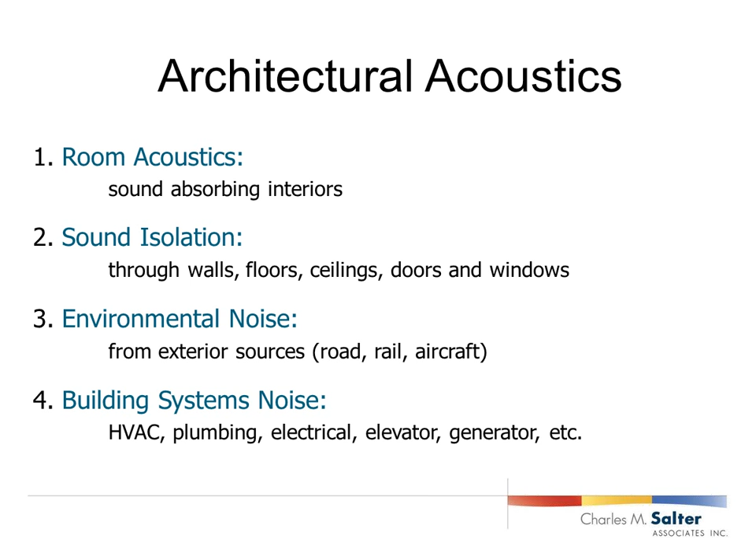Historic buildings pose specific challenges for acoustical engineering. The first is materials and appearance. We're often trying to match the period aesthetics, picking acoustical materials that don't look inappropriate for the space. The other issue is not disturbing existing historic elements. There may be architectural features being preserved, with limited space to apply new acoustical treatments.

The second issue is a changing noise environment. You may have a noisier building than the original functioned as, such as a music venue that used to be a warehouse. You also can deal with a louder exterior environment than originally, like a new roadway, expanded roadway, or a new flight path over the building.

The third issue is adaptive reuse. You may have new interior noise criteria, where the building needs to function quieter than it did before. This comes into play especially with environmental noise and HVAC noise, getting the NC rating down where it's appropriate. The other issue is installation of building systems. Oftentimes you may be installing a larger HVAC system, and this can cause problems for noise.

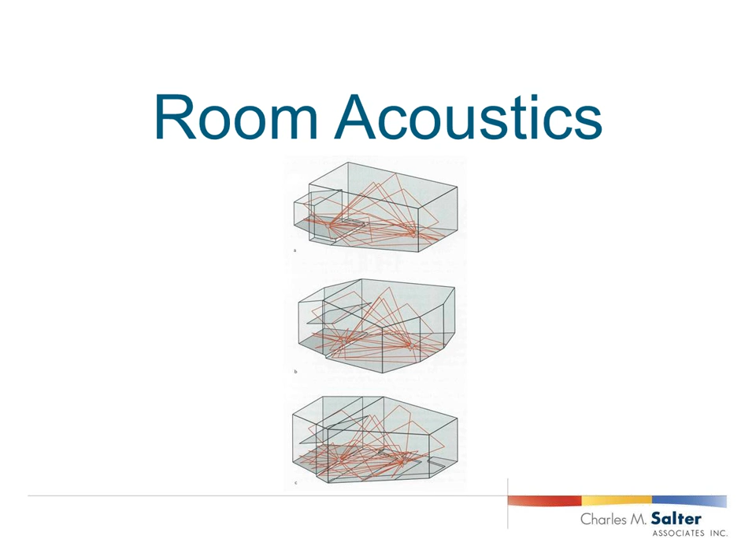This is the first of the four elements we'll be discussing as part of architectural acoustics, which can be thought of as the reflectivity within a given room. Here we see ray diagrams from a computer model, from a source on a stage of a performing arts venue to a receiver. This was an analysis that's in the appendix of a book we wrote, and we'll talk more about that in a few minutes.

Room acoustics is basically designing the building interior for aesthetic quality and pleasurable listening. This would be analogous to picking soothing colors, if you're an architect. It involves the analysis of direct and reflected sound. So when we're standing outdoors, what we're hearing is direct sound mostly, and maybe reflections off the ground, but we are not enclosed, so we don't get walls or ceiling reflections.

Speech intelligibility is something common to many building types, and it would be improved by reducing reverberation. This is really important. We've got the example of poor speech intelligibility in a cathedral, where you have a 3 or 4 second reverberation time, versus excellent speech intelligibility in a really well-designed conference room or even a recording studio.

So where we would concentrate on room acoustics is any place where speech or music or any other form of audio communication is to be transmitted to a listener. So you get spaces like theaters, concert halls, cinemas, restaurants, classrooms, courtrooms, places of worship. All of these can have a consideration for room acoustics.

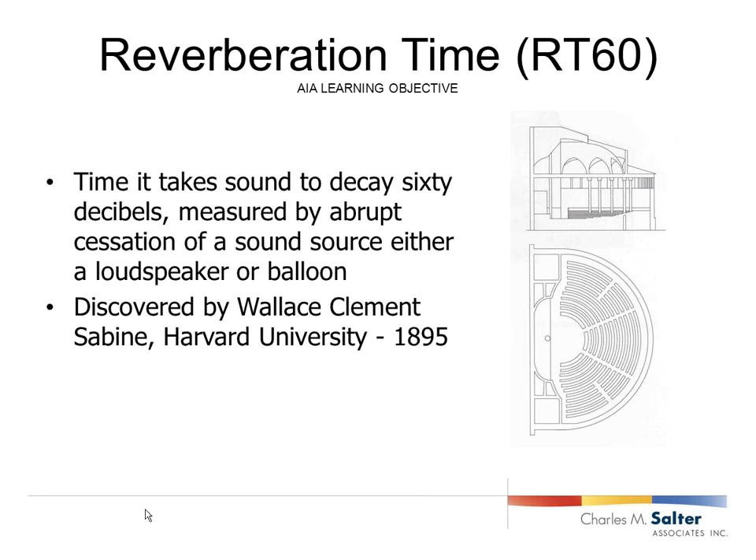So what determines reverberation time? Sabine discovered that it's directly proportional to room volume, so one would expect a cathedral to have a much greater reverberation time than a conference room due to its size. However, he also discovered that it was inversely proportional to the amount of cushions or sound absorption he brought into the theater.

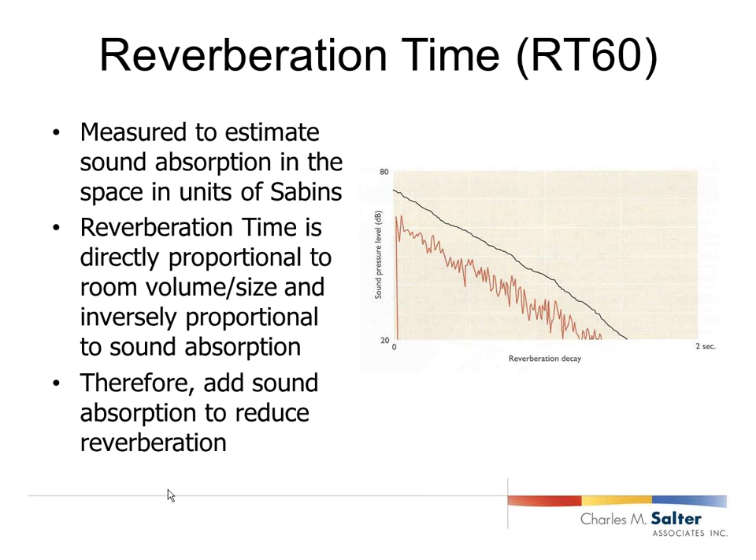So if you wish to reduce reverberation, you can add sound absorption, or you may even be able to decrease the room volume just a little bit.

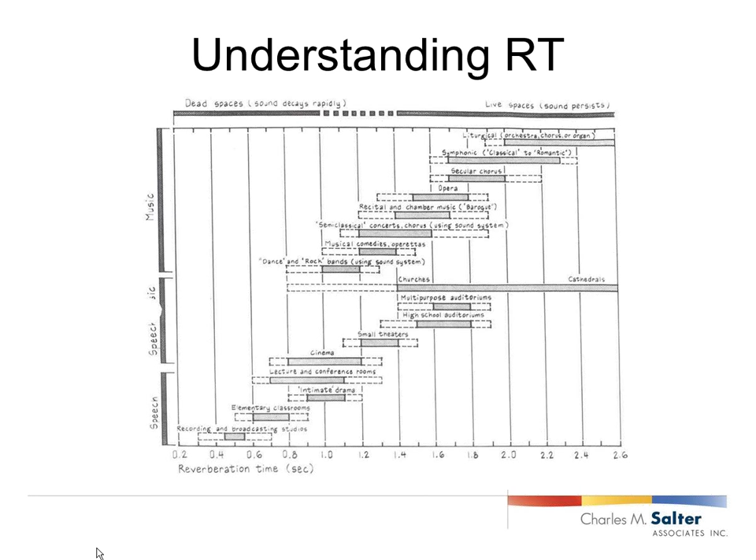In fact, cathedrals can go out to 10 seconds. So from graphs like this in acoustical textbooks, you can get a rough idea of where your space should fit in. This is an older graph - it shows cinemas at somewhere between 0.8 and 1.2 seconds. We learned in the late 80s from Tom Holman at THX and Ioan Allen at Dolby that in fact that needs to be much lower.

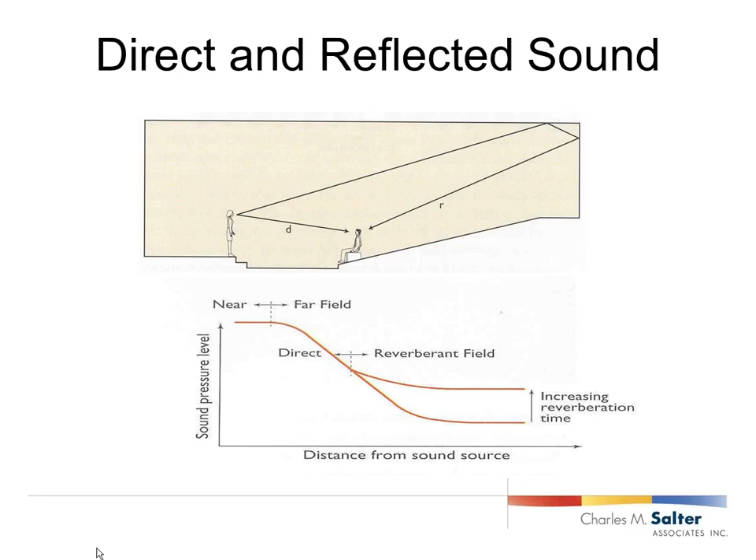You can see a dashed line there, and that's right where the listener is sitting up above. He's in a pretty good spot because he's getting probably enough direct field. However, the rest of the audience in this room is in the reverberant field. The only way we can improve that is shown by the line for increasing reverberation time - if we decrease reverberation time, we will get a larger direct field covering more of the audience. So that's how the physics of this works.

In talking about reverberation, we tend to think about specular reflections first, which bounce around like in the very first room acoustics slide I showed - the angle of incidence equals the angle of reflection. The problem with those kinds of reflections, largely from large, flat, hard surfaces like big expanses of drywall, plaster, glass, or stone, is that they're very harsh reflections, analogous to glare in lighting.

So when we design spaces, we go looking for absorption to control the reverberation time to an appropriate level, and diffusion to prevent this glary, harsh type of reflection.

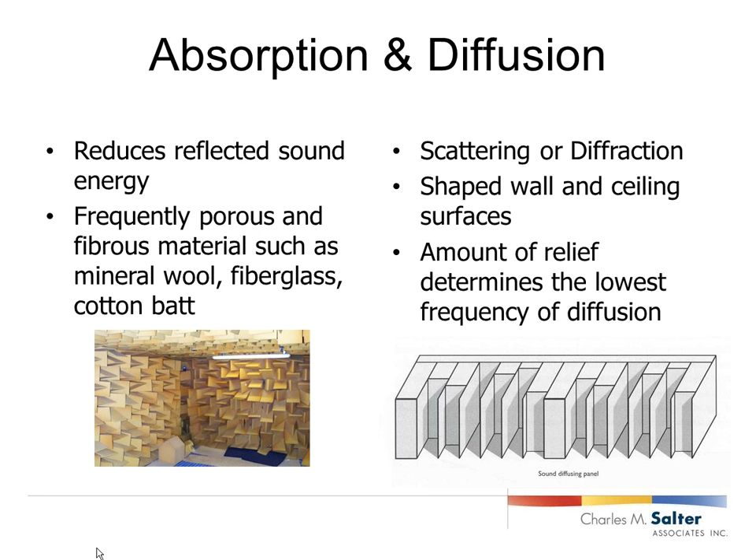On the other side, we have the idea that we don't want specular reflections, but we want reflectivity. So we shape a surface in a certain way - you've seen these convex and concave surfaces, with convex usually being preferred. We also have this thing here, which is a special diffuser called a prime root diffuser. There's a company called RPG that has done a lot of work with that kind of thing and offers quite an array of products in this line of room acoustics.

We're mostly familiar with sound-absorbing panels, and these are almost commodity items today - think of Armstrong, Owens Corning, and these big fiberglass manufacturers. These things can be wrapped in porous fabric, often like a Guilford FR701, which is fire retardant. The porosity means we can allow air to pass through it - a test of a porous fabric is, if you put it up to your mouth, can you blow air through it? Those are very common and fairly economical.

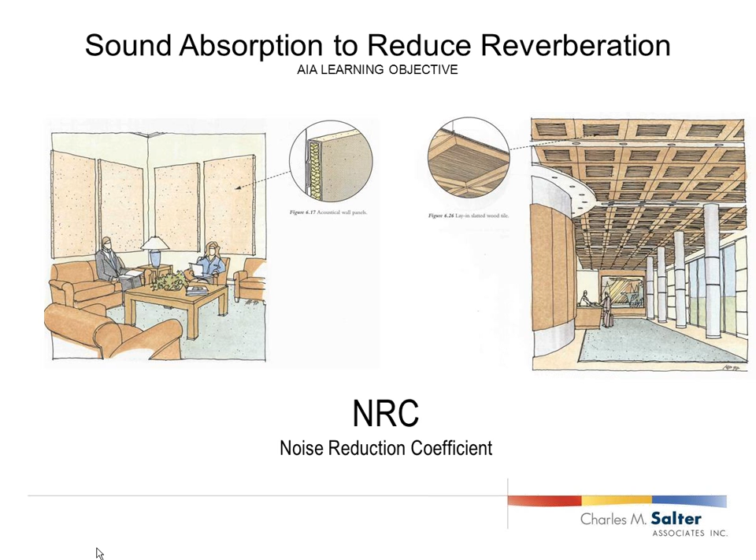Probably the least expensive sound-absorbing material is a lay-in ceiling. However, there are a lot of other ways we can have a different appearance for sound-absorbing material - it doesn't have to be an acoustical tile ceiling or a fabric. Nowadays we can have perforated wood, slotted and perfed metal, and porous sintered metal. So there are a lot of coverings that can be used to conceal the sound-absorptive material. Of course, the covering has to be sufficiently porous, and sometimes the coverings act like a filter, so we need to be careful about the selection of the covering.

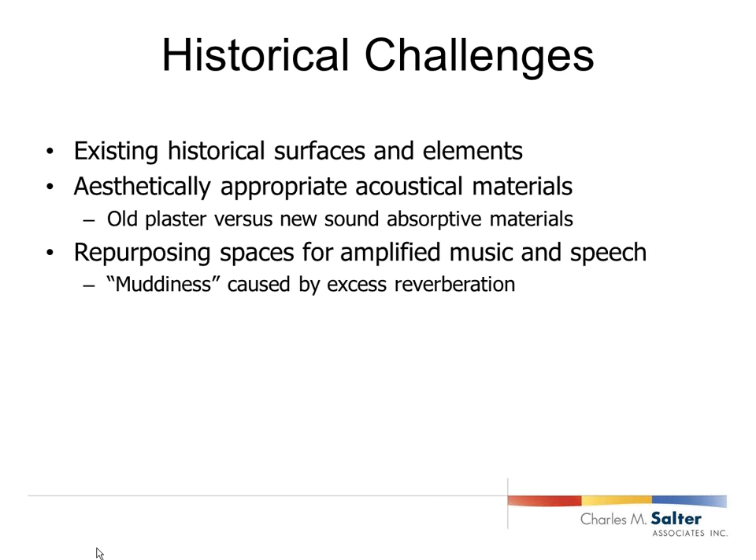The other issue is repurposing spaces for amplified music and speech. Oftentimes a space may be fairly reverberant, with a lot of that old hard plaster, and you get a muddiness in the space when music and speech are loud. You don't want a lot of reverberation because it starts becoming almost like echoes, where sound lays over on top of itself and you can't hear the person the way it's meant to be heard.

Some of the solutions to room acoustic problems are shown on this slide.

These are going to be the products with historic style. Luckily, there's more and more options being manufactured all the time. A pretty cool one that's fairly new is the Armstrong Metallaire, a perforated panel that can come in all these colors, and it really looks nice in a historic space, letting you match it up with what you're trying to do aesthetically.

On the right corner is the cotton bat that David talked about earlier. It's a recycled product, so it's also considered a nice green product, and it really presents a historically authentic acoustical environment. You might get your space back to what it would have sounded like when it was originally built, because they probably used cotton bat as absorption originally.

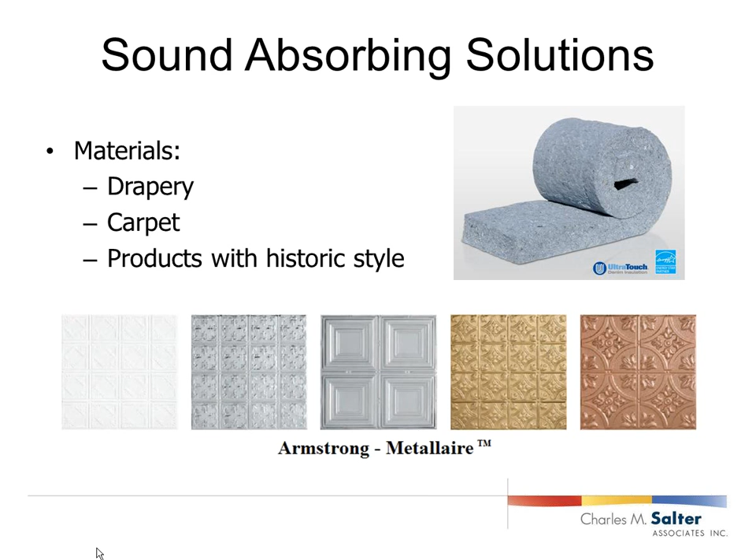We also find that adding drapery and carpet is a pretty good solution. Drapery can look really nice, especially in theaters. Carpet can be applied in restaurants and along the aisles of theaters and whatnot.

And we're going to come to our first case study. This is Cavallo Point in Sausalito, California. It's a military fort that was converted to a luxury lodge, and this picture is their restaurant. They've done a lot of good things in here. Most people can relate to restaurants being an unpleasant, noisy environment. We've all been in those restaurants that are concrete and glass, and they're really pretty, but they're not that pleasant.

Our next case study is a theater in California, a movie palace from 1928 that's been converted to a music venue for both amplified and acoustic music. There's some cool things in this one. One option they've gone with is applying absorptive materials behind these acoustically transparent spaces, so without disturbing the existing architectural elements, they were able to add absorption.

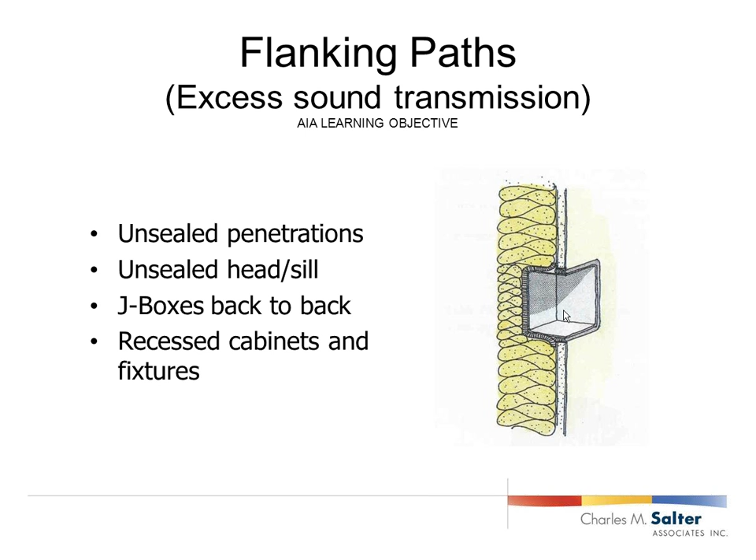So we would back into those kinds of things in drywall. It's a lot like fire rating. If you think of some of the things you do in fire rating and smoke rating, a lot of that is true for sound rating. So sound rating and sound isolation are really the same thing.

Now, what are some of the physical characteristics of wanting to improve the sound isolation or STC? Well, we can double the mass. So if we have a window, we could double the thickness of the glass. We would expect maybe to get somewhere in the range of 4 to 6 points. In theory, we should get a 6 dB improvement, but that doesn't always happen.

If we double the airspace, so if we build a wall and we use 3 5/8 studs, and then we come back and use something that's almost twice that much, we could maybe expect a 3 or 4 dB increase. In some cases, if we decouple the studs, we might get a 5 or 6 dB increase.

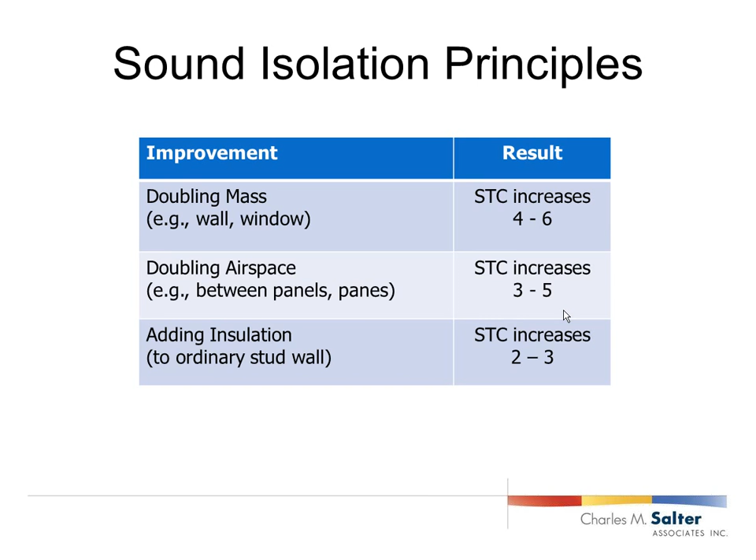Now, for something to be sound rated, it really must be insulated and caulked. And here we're talking about the insulation. So if we just have an ordinary single stud wall and we add insulation, we can expect maybe a 2 to 3 dB increase.

Now, if we start increasing the number of attachments, and this is sort of more academic here. For instance, if we start applying an excess number of screws to the attachment of drywall, we'll actually start decreasing the STC rating. Conversely, if we're in the lab and we want to cheat a little bit and get a really terrific rating out of our wall, we might use very few fasteners, even substandard.

We've seen that done. So if you have an isolated construction, meaning something using a resilient channel, Kinetics makes something called IsoMax, and there are other similar products using rubber elements. When you add the insulation into an assembly with that kind of isolation, suddenly the insulation's worth a whole lot more. Now we're getting a 5 to 10 STC point increase.

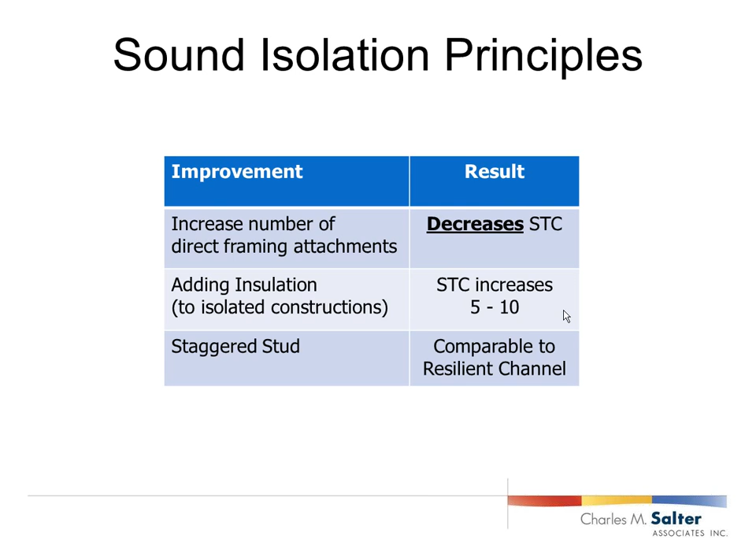You can generally say that staggered studs would be comparable to the performance of a resilient channel using the same number of layers of drywall. Actually, we prefer the staggered stud if we can use it because resilient channels are subject to mal-installation.

Through lab testing, it's been discovered that light gauge metal studs, in particular 25 gauge studs, outperform heavier gauge metal studs, and that's because they are more resilient, and they wind up giving a rating comparable to a wood stud or a stiffer steel stud with a resilient channel.

Now, we all tend to think of masonry and adding a lot of mass, but just using masonry on its own really doesn't do the job. You need to fill it with grout to get the mass up on the average, and you also need to seal the porosity of it. And that can be done with a waterproof coating, paint, or plaster.

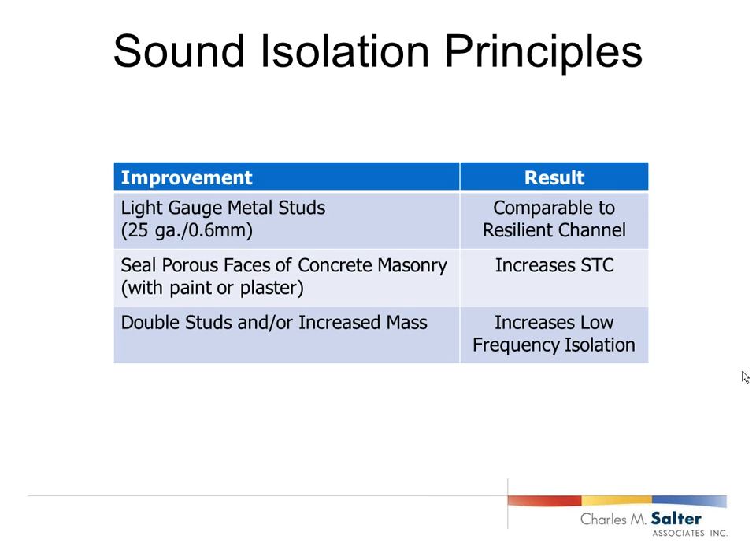And finally, if you want enhanced low-frequency performance, that is really the hardest thing to get. So if you were next to a machine room and you had a residence nearby, you would want double studs, or a CMU wall, something that will have better performance in the low frequency range. Now, STC, unfortunately, only rates down to 125 hertz. It ignores everything below 125 hertz. So this really starts to address issues that are not addressed by the standard rating system.

Then there's specific historical challenges in sound isolation. The first is limitations of existing assemblies. You may have an existing wall that can only be treated on one side or the other due to architectural elements. Another issue may be wood structure or otherwise subpar structure acoustically.

Wood itself tends to be creaky and not have great sound isolation properties. There's also a problem with intersections of existing and new structures. You may be butting up a new partition against an exterior mullion wall or brick wall that's been deteriorated a little bit and have trouble sealing that intersection.

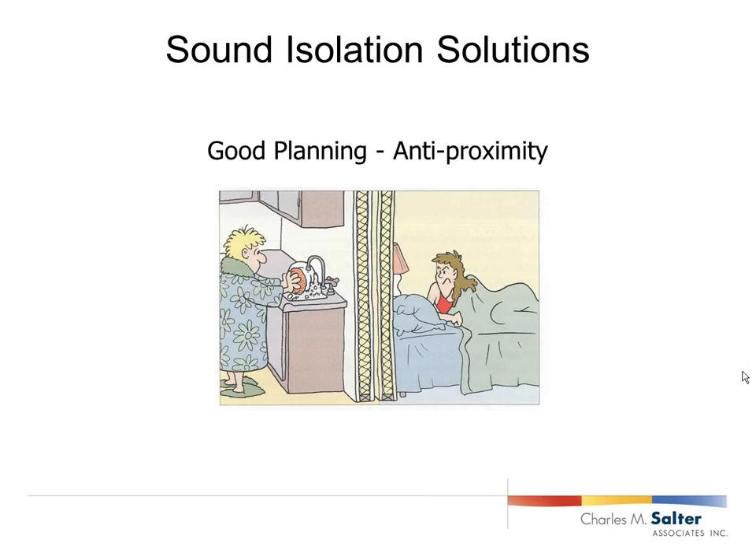One of the solutions we can use in sound isolation issues is just good planning. We call it anti-proximity. Don't put loud things next to quiet things. Unfortunately, this is often restricted in historic restoration.

Another solution can be various construction solutions. You can do drop ceiling for floor-ceiling noise, or an underlayment under any hard floors, hardwood floors, tile. Another option is furred walls, especially if you can't deal with a wall because of architectural features or structural issues that can't be moved. You may want to make it a sturdier acoustic wall by furring it out using resilient channels, as shown in this picture, or resilient clips.

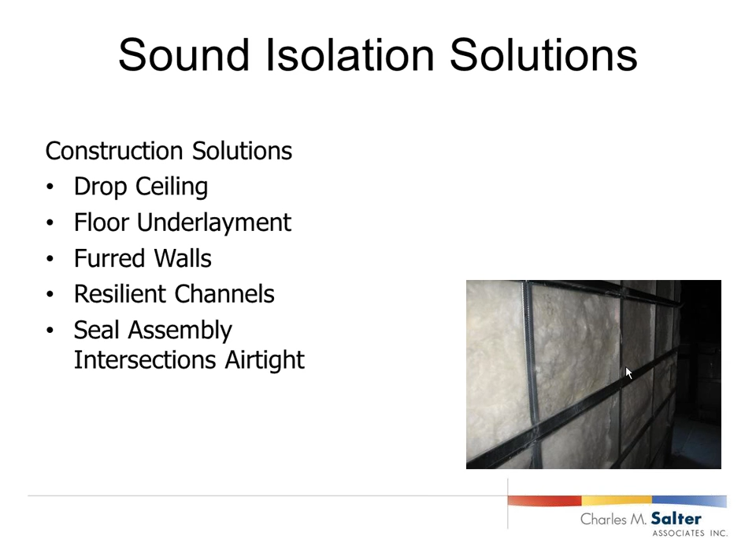The other approach, of course, is sealing those assembly intersections airtight. Lastly, if you run out of other options, you can apply sound masking, which will help with speech privacy. It's introducing noise into the background, just white noise, that will help drown out other noises that are more annoying.

Our first case study for this is the Battery. This is an industrial building converted to a private social club. This is actually where the Salter offices were originally in the 70s. This is in San Francisco. It's a wood frame building with a restaurant in the bottom. There will be a private club in the middle and hotel rooms up in the top, or residences.

There needs to be a lot of acoustical separation between these floors, and our approach to that was these spring isolators for the drop ceiling, which really provides a greater level of acoustical separation than just a plain drop ceiling you might see with ACT tiles.

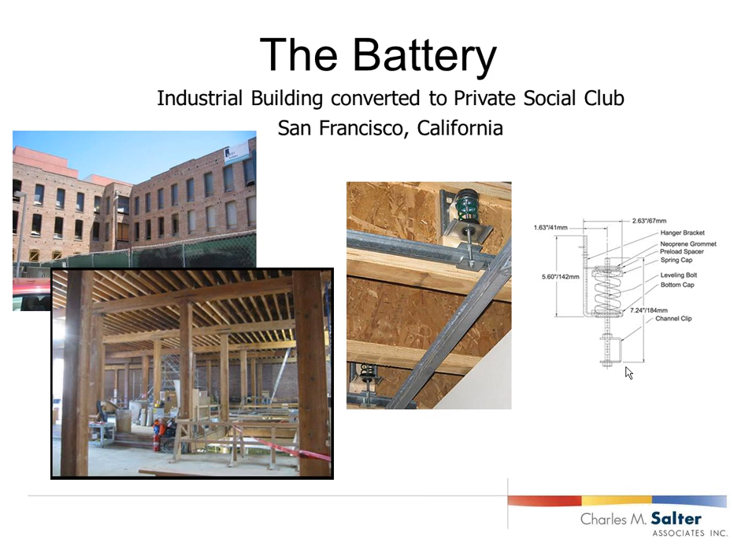Next case study is Ghirardelli Square. This is 4 buildings up in Fisherman's Wharf in San Francisco. It was the old chocolate factory, converted to luxury timeshares. The buildings are from the 1890s through the 1960s when they were constructed originally. You can see here the issue of the deterioration of the grout, and the brick's been worn down unevenly. And you have a partition being built up against it that wasn't properly sealed.

We came in and tested it after construction, and the noise was going straight through from one side to the other. But they were able to come in and finish these walls really nicely, sealed up airtight against these exterior partitions.

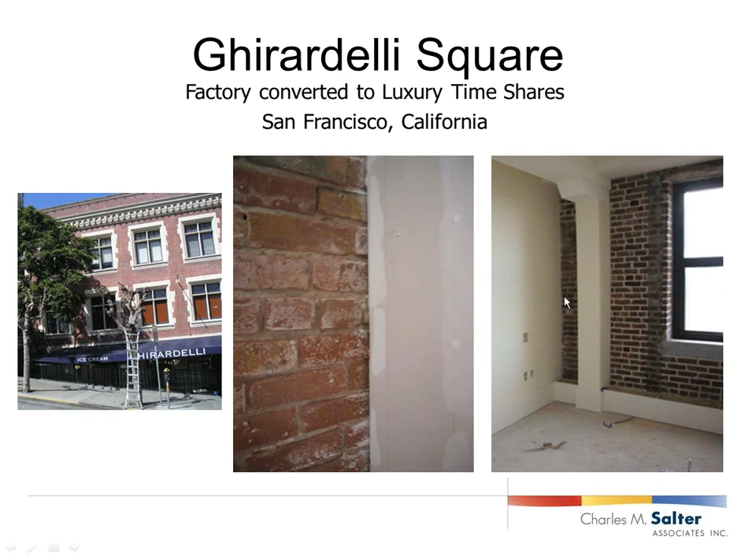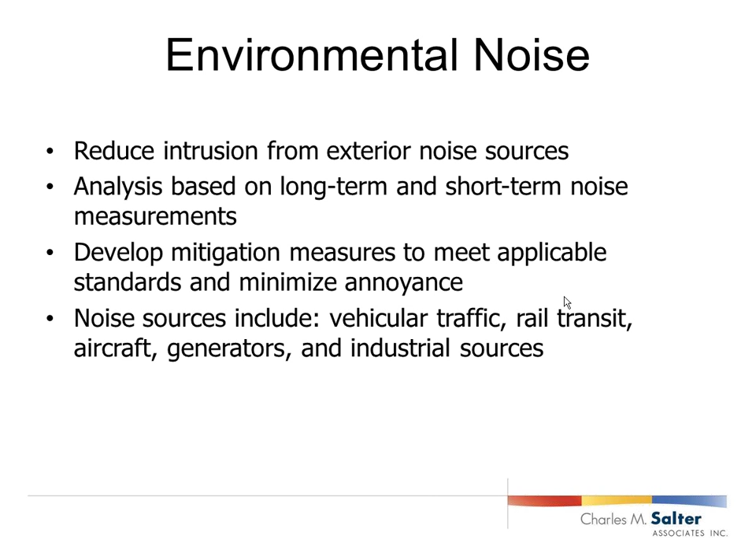The environmental noise is our next topic. This is going to be reducing intrusion from exterior noise sources. This is typically done by conducting long-term and short-term noise measurements, analyzing this to come up with noise levels existing outside of the building. We will then develop mitigation measures to meet applicable standards and minimize annoyance. This is going to be designing doors, windows, walls to deal with the exterior noise conditions of your building. The noise sources often include vehicular traffic, rail transit, aircraft, generators, and industrial noise sources.

The first step with environmental noise is typically measuring the environmental noise, and this is done with an A-weighted sound level, called dBA. It's a filter that you run noise through that basically acts like the human ear. The human ear really focuses on this 1 to 4K range. We're more sensitive there because most communication happens above the 250 frequency range. So these lower frequencies are really less important for human hearing, although it can cause rumbles and stuff, which is oftentimes what can be caused by traffic noise.

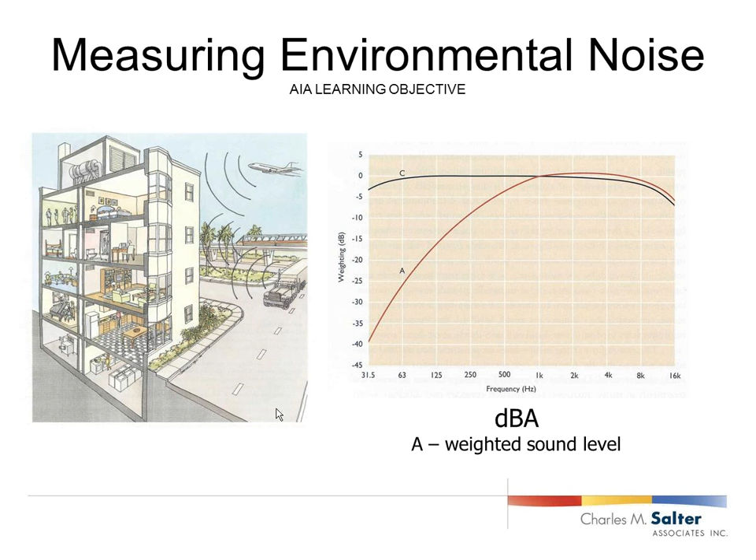Also, it's important to note here that trees and plants do not help with noise levels.

On here we have the planning guidelines. Oftentimes these exterior noise levels are used to create this kind of topographical acoustical map. Then a city planner can come in and use these maps and a graph like this to decide where it's appropriate to build things like residential units or auditoriums.

This is Treasure Island. We designed that acoustical map recently.

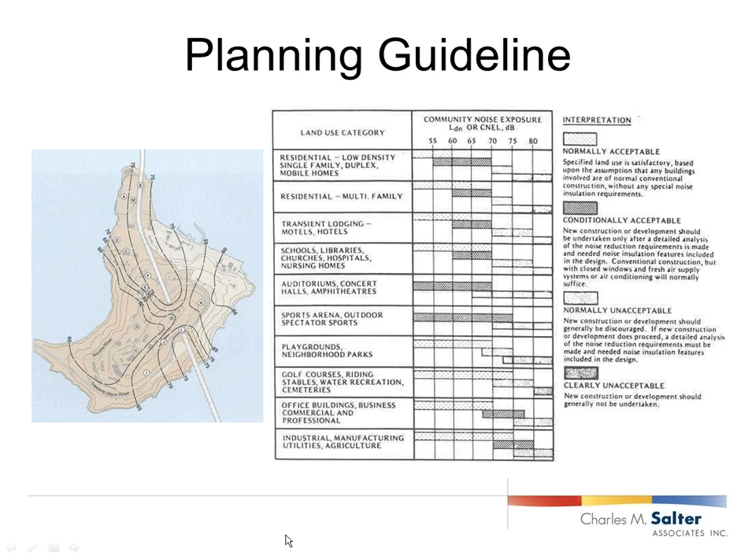The historical challenges with environmental noise are often the changing noise environments, either exterior noises like noisy neighbors or new roadways. The other issue is adaptive reuse with quieter interiors, such as things going from factories to residences or educational spaces.

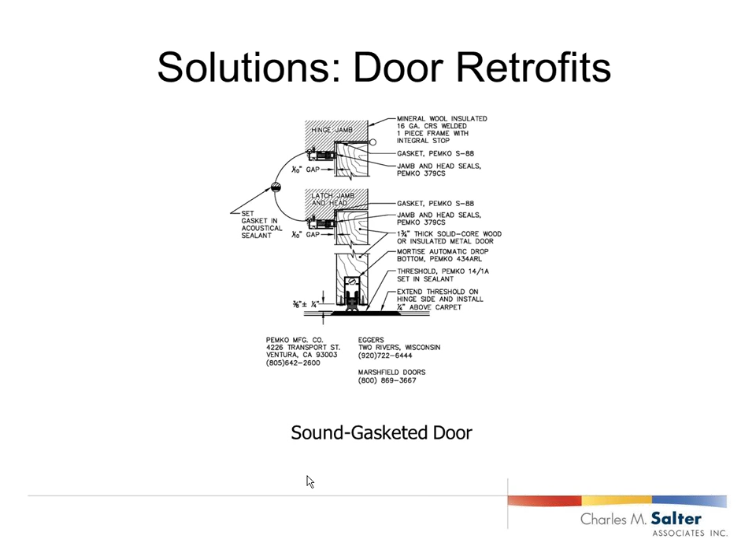One of the main solutions is going to be door retrofits. We can either recommend STC-rated doors or sound gasketed doors, but it's even possible to apply these sound gaskets to your historical doors. Doors are often a weak link for environmental noise.

The other weak link is typically windows, and especially historical windows. Architects really like to keep these elements. They're often a part of a historic charm. So one of the main solutions for environmental noise is going to be this interior window sash, which will significantly reduce the amount of exterior noise coming into your building.

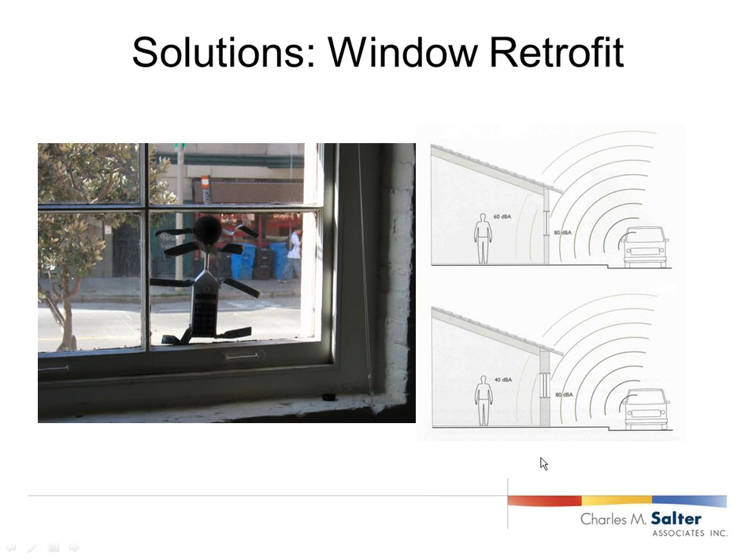This adaptive reuse was a problem. We were able to determine how thick their windows and their doors needed to be and what other updates they needed to their exterior to meet noise codes and have happy neighbors.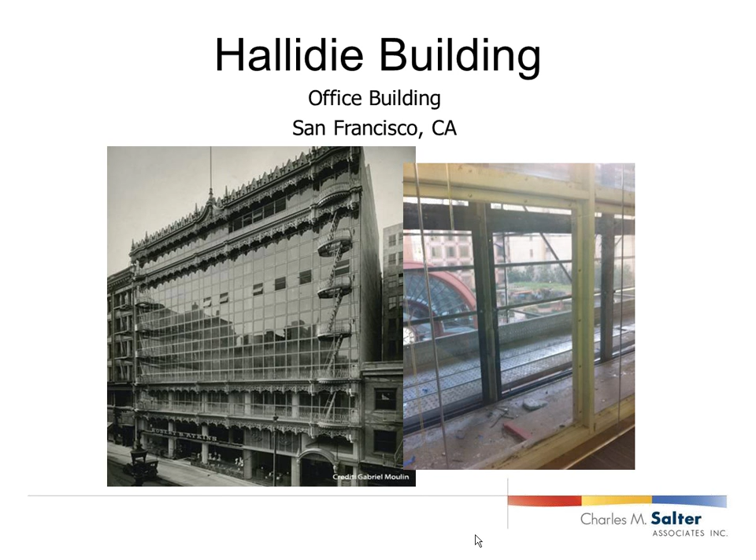Our solution to the very loud roadway right outside was to build this interior window, giving it a very large airspace, as you can see in here. And we got a very significant reduction in noise, about 20 dBA.

Our next topic is going to be building systems noise. Really the goal is to create a quiet and comfortable environment, engineering and consulting on the mechanical, electrical, and plumbing systems to help reduce the noise coming from these.

Vibration disturbances are also an issue, and you really have to worry about noise both indoors and outdoors. There's noise codes restricting noise from your MEP systems, both indoors and outdoors. This is going to apply to pretty much all buildings that have MEP systems.

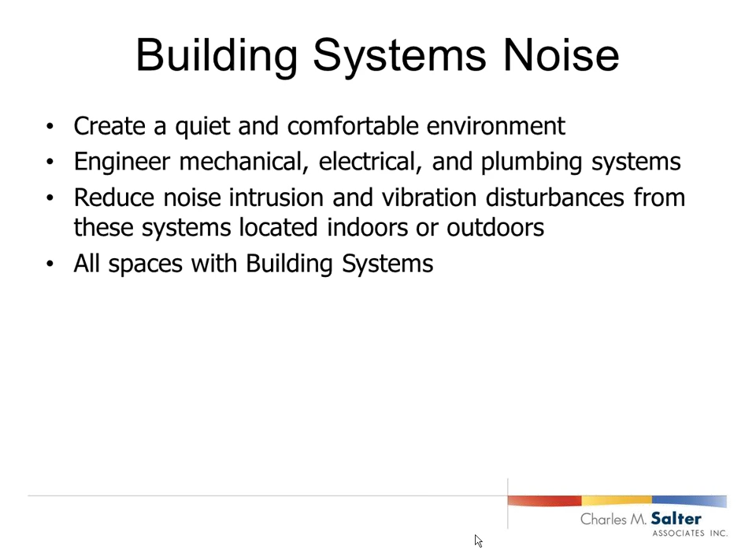We rate the noise from HVAC systems using noise criteria. We go in and measure the background ambient noise in a space, and we're able to apply this noise criteria rating to it. It's a curve that's weighted similar to the way we hear and to what noises are disturbing to us.

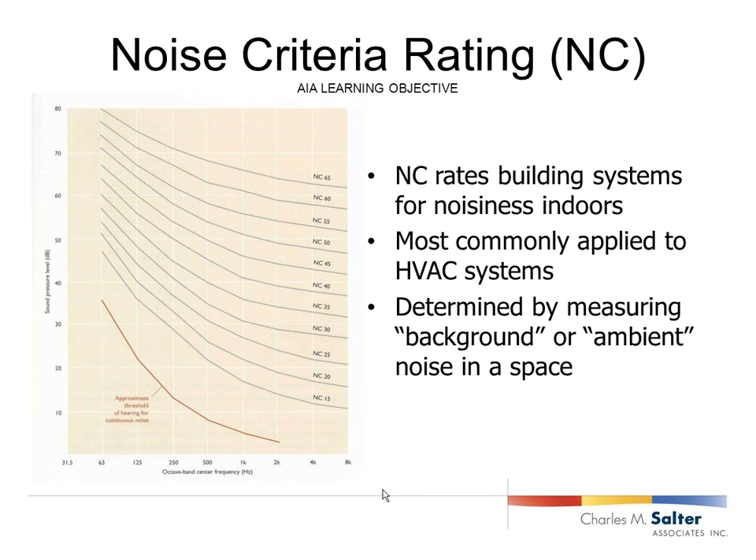Another issue is outdoor noise restrictions. Oftentimes this applies to generators, and here you can see a generator shown on a rooftop, and it's an issue for it to be meeting the property line. Most cities have noise restrictions on how loud this can be at the property line.

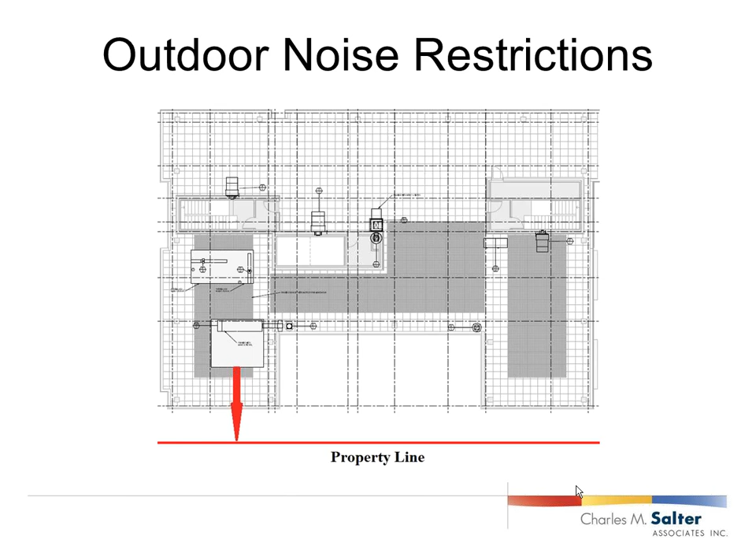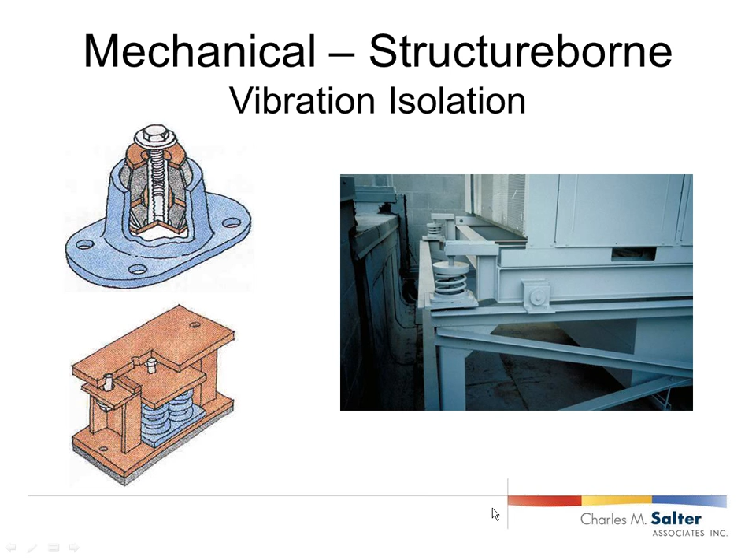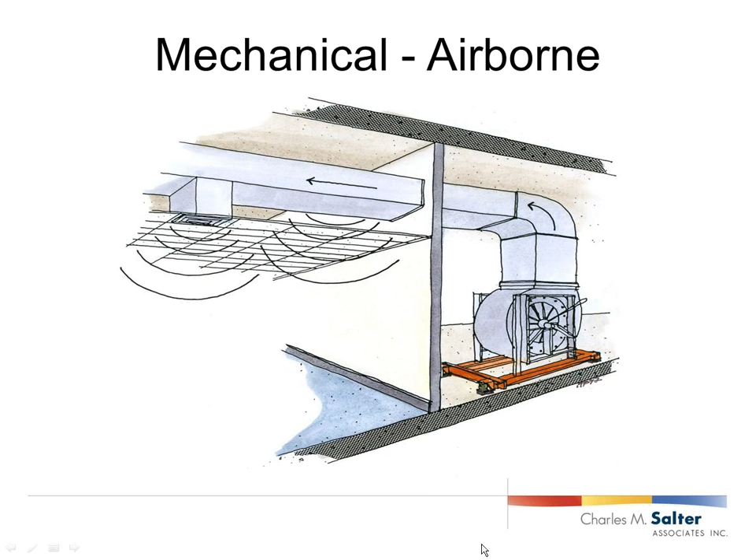Another issue with mechanical is going to be airborne noise. This is where the noise comes out of the mechanical equipment and comes to you through the air rather than the structure. It can come out of the diffusers or radiate out of the ducts, as shown here. Typically, this is dealt with silencers or duct lining.

Plumbing is also an issue when you're installing new MEP systems, both for the restrictions in space, for there being enough space around your pipe, as well as pipe isolation from your structure, especially when you have creaky wood structure. And here you can see a spring in here.

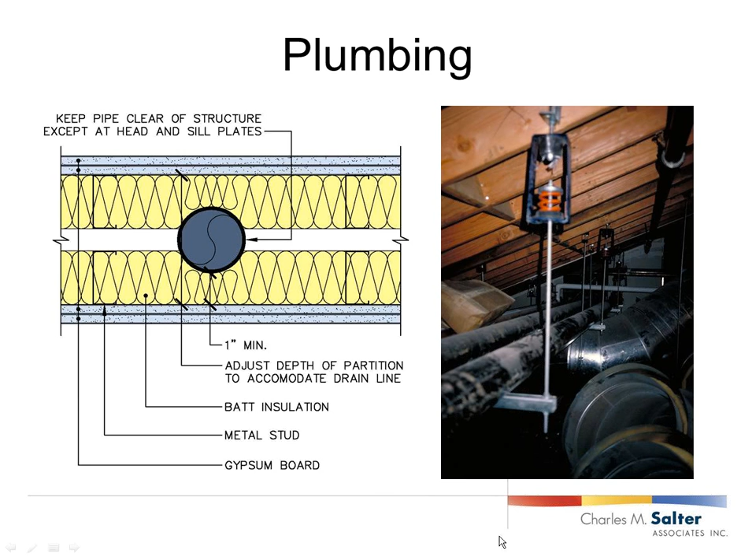The historical challenges really involve being constrained by space and structure. You may have limited options for equipment location. It may need to be on a rooftop or maybe outdoors, or maybe in a mechanical room that's less than ideal location.

You're also going to have minimal space for pipes, ducts, or vibration isolation systems like springs. You also may create leaks in your space when you create holes in your assemblies for these new pipes and ductwork.

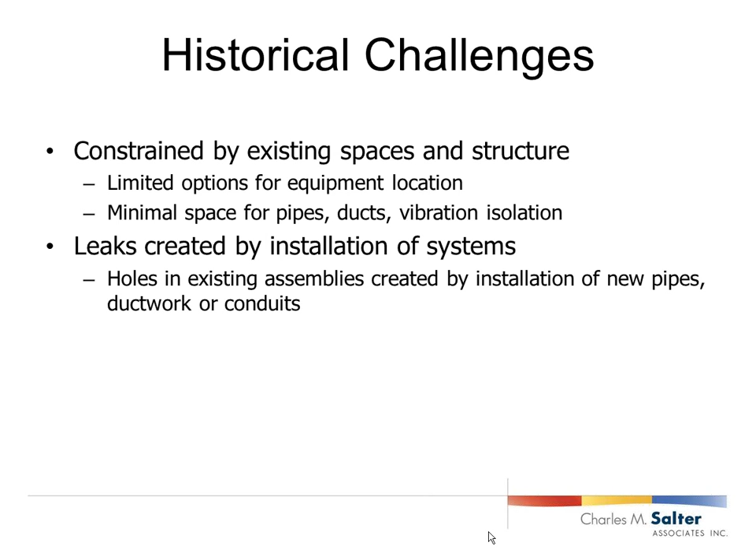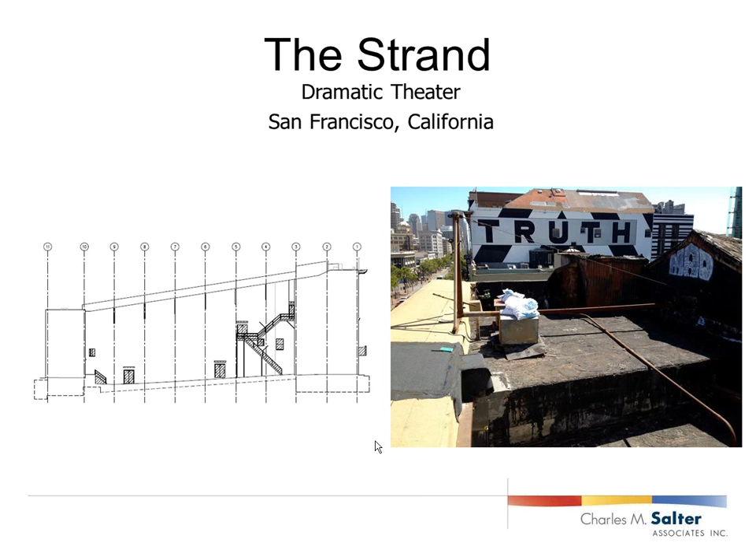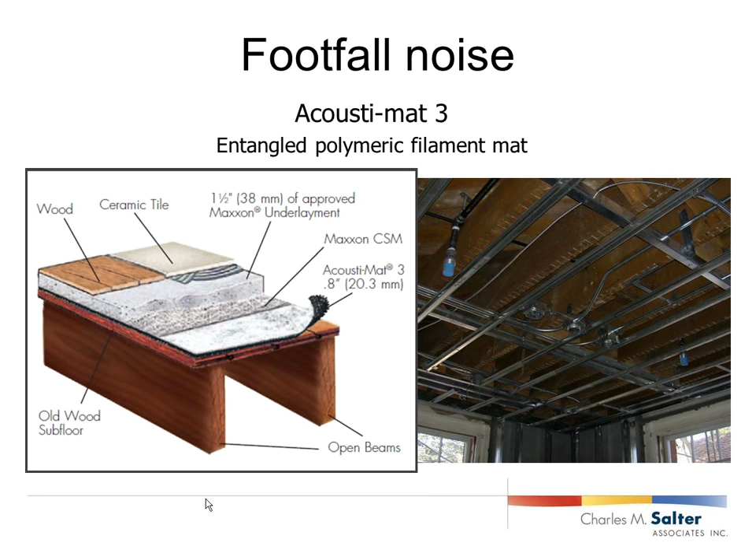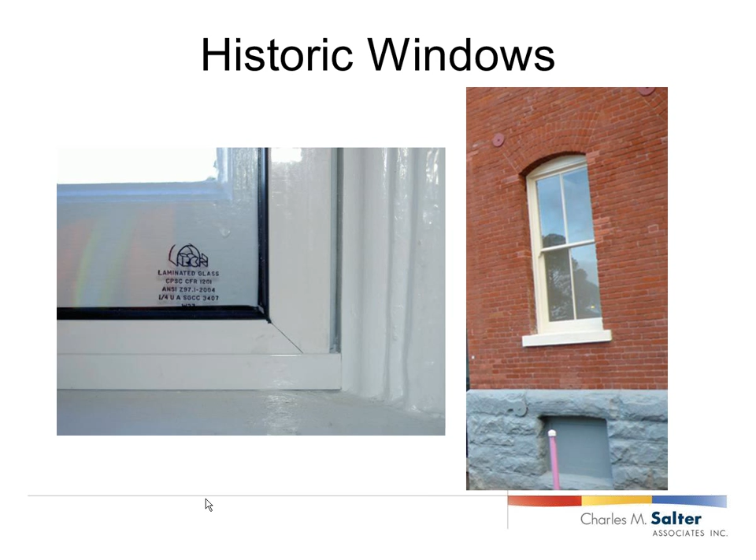We also have Doyle Drive, which has been recently rebuilt, and we have in this project windows very close to Doyle Drive, as you can see here. Earlier you saw the improvement using an interior jockey sash, and that is indeed what we have. Here's a close-up on the left, and you can see we used a quarter-inch laminated glass, and on the right you see the exterior appearance.

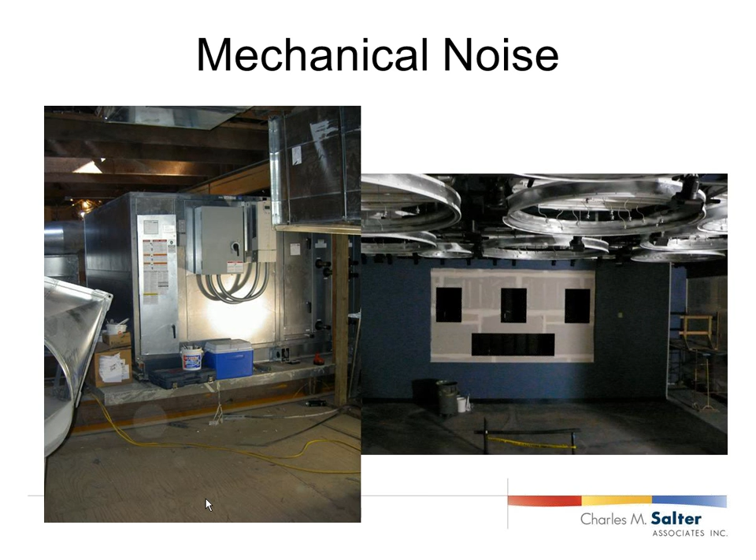On the right-hand side is the new theater in the Disney Family Museum, and on the left is the air handler. Earlier we were discussing how mechanical equipment needs to be quieted. In this case, this air handler is directly beneath the theater, which is in the basement, so there's a sub-basement that the air handler lives in, and we had to apply sound attenuators, duct lining, and even a room enclosure around the air handler to make sure it did not radiate sound into the theater above.

Another project that we worked on with ELS Architects is St. Mark's Church here in San Francisco. Here the issue was much different: it was to keep the long reverberation time for a brand new organ. This is a tracker organ, installed in the balcony, and all of this really was part of a seismic retrofit. The building was unreinforced masonry. It's been reinforced as part of this project.

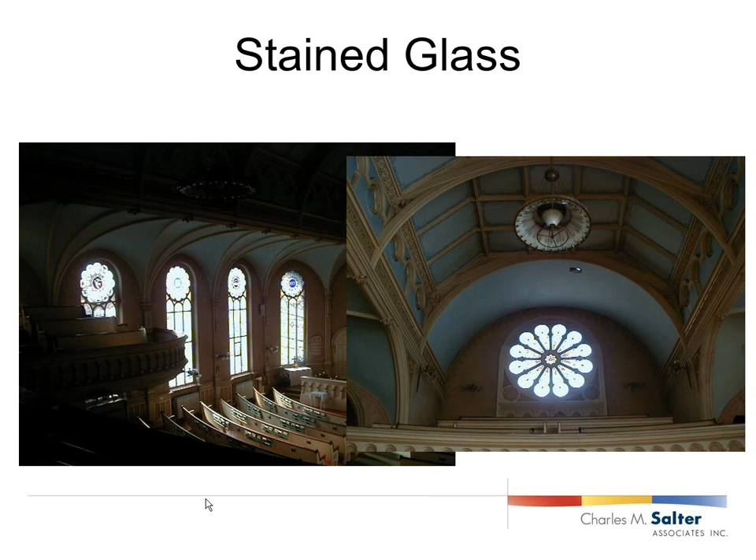Here you can see on the left a shot of the nave, and then another picture looking back up before the organ was installed in the balcony. There's a fellowship hall below, and there was an impact noise issue as well as airborne noise issues between the sanctuary and the fellowship hall below. The solution there was relatively straightforward: we put in resilient channels and a couple layers of drywall and bat insulation, which was a pretty good improvement over the old plaster ceiling with no insulation and no resilient channels.

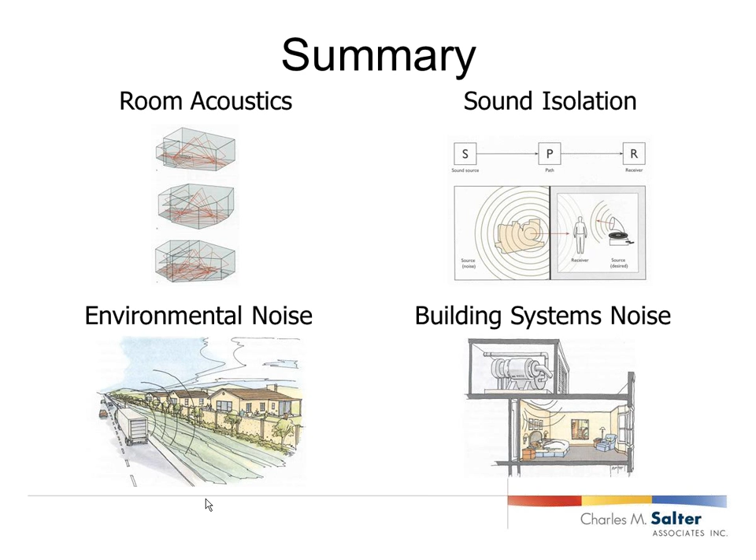So in summary, we've been talking about room acoustics and reverberation. We've talked about sound isolation, or the attenuation of sound through building walls, floors, and ceilings. We've talked about the impact of environmental noise on building shells and facades and the need for better windows and doors, and good gasketing in particular. And finally, building systems noise, from elevator equipment to ventilation equipment, plumbing, all of that should be considered.

So I'm going to discuss the AIA Learning Objectives. Remember that STC and NIC are ASTM standardized under E90, and these relate to sound isolation. The NRC rating is on a scale of 0 to 1 and talks about the absorptivity of a material. NC, noise criteria, and A-weighted sound pressure level, or dBA, are both loudness ratings. ASHRAE is the definer for NC and RC, room criteria—they're both noise ratings. Reverb time is really the liveness of a space. And finally, sound flanking is what we're trying to avoid—we don't want excessive leakage through air holes and the like.

Finally, I want to mention that we produced a book in 1998 which is largely still relevant today. Maybe only the audiovisual chapter has changed significantly, and even then the planning aspects are still the same. If you're interested in acoustics, this book is neither a coffee table book, nor a reference book, nor a textbook. It's sort of a combination of all three.